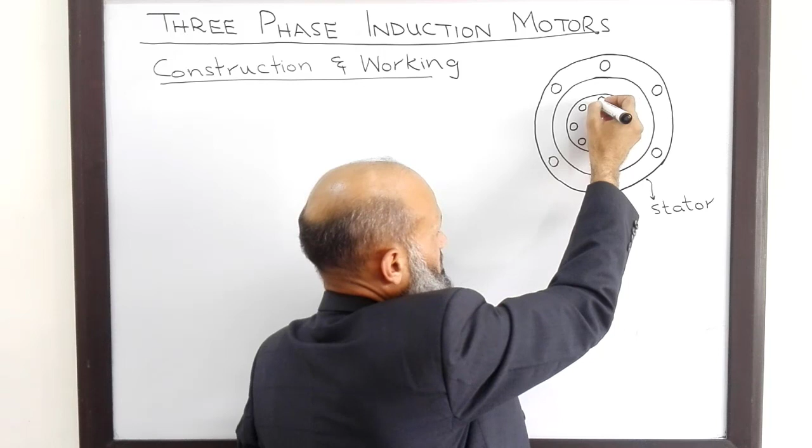These bars are then shorted to each other with the help of shorting rings, both at the front end as well as at the back end. So if you look at the rotor from the side view, it should look like this one. We have a cylindrical rotor with multiple bars of conductors placed on it, and at both the ends these are shorted by shorting rings. Here is a shorting ring and here is another shorting ring.

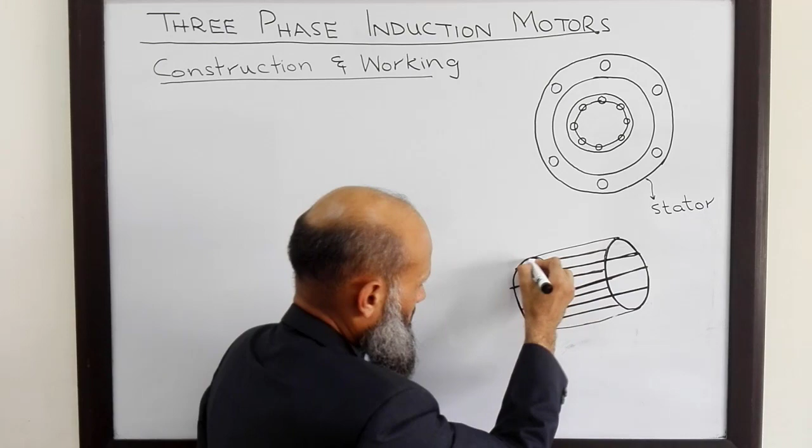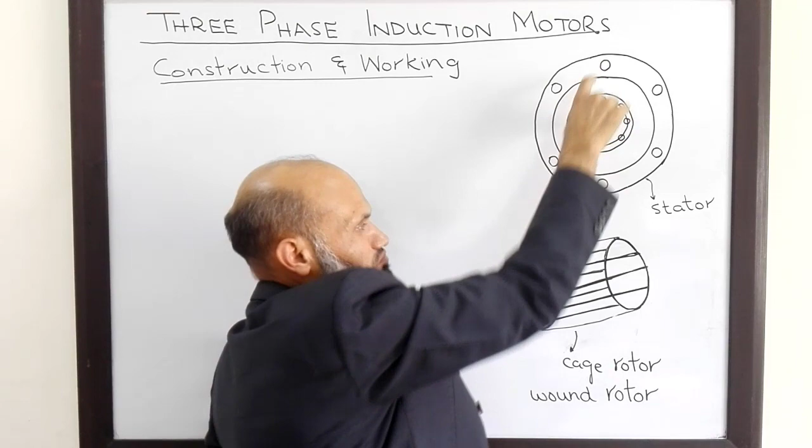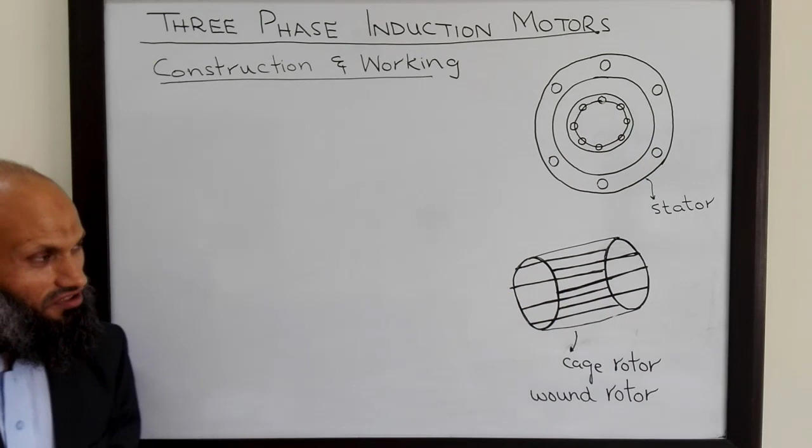This is not the only type of rotor in three-phase induction motors. This is the simplest one, which is called cage rotor, and this has the advantage of low cost. There is another type of rotor which is called wound rotor. In case of wound rotor, the windings on the rotor are just the mirror image of windings on the stator. Corresponding to this coil there will be one coil over here, and likewise corresponding to the third coil there will be a third coil on the rotor.

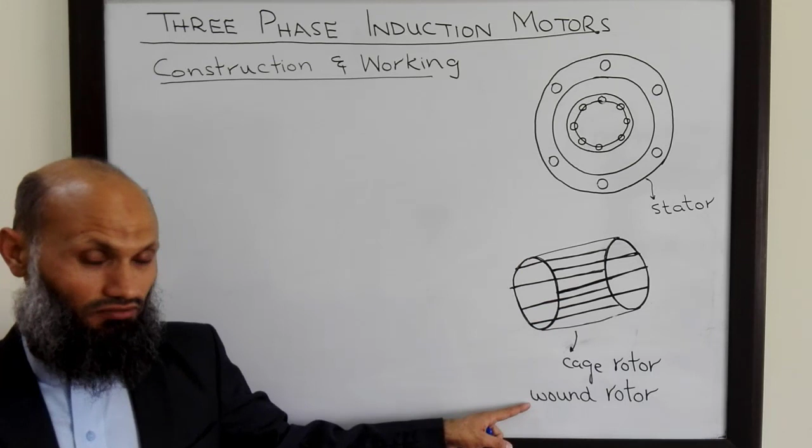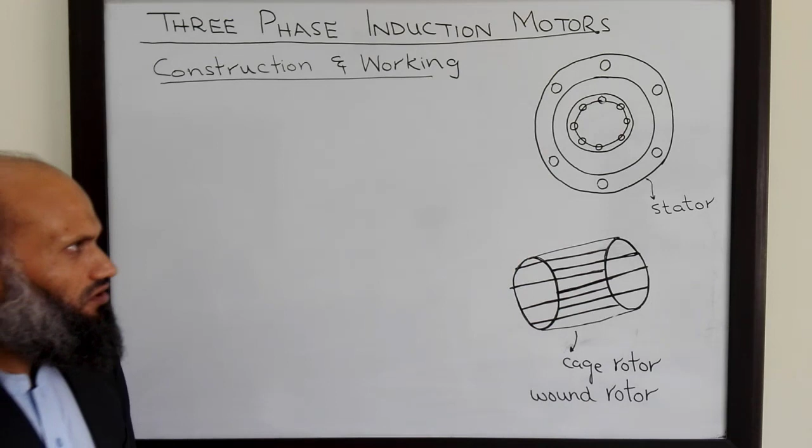The wound rotor is more expensive and is less commonly used. However, this wound rotor has an additional advantage. That is, we can modify the torque speed characteristics of this three-phase induction motor with the help of wound rotor. We shall talk about that in the later lectures.

Next, we talk about working of this three-phase induction motor. When three-phase currents are supplied to the set of three-phase coils placed on the stator, a rotating magnetic field is produced, denoted by Bs. The speed of rotation of this stator magnetic field is related with the frequency of the voltage supplied to the stator windings. For a simple two-pole machine, depicted over here, the speed of rotation of the stator magnetic field is equal to the frequency of the applied voltage.

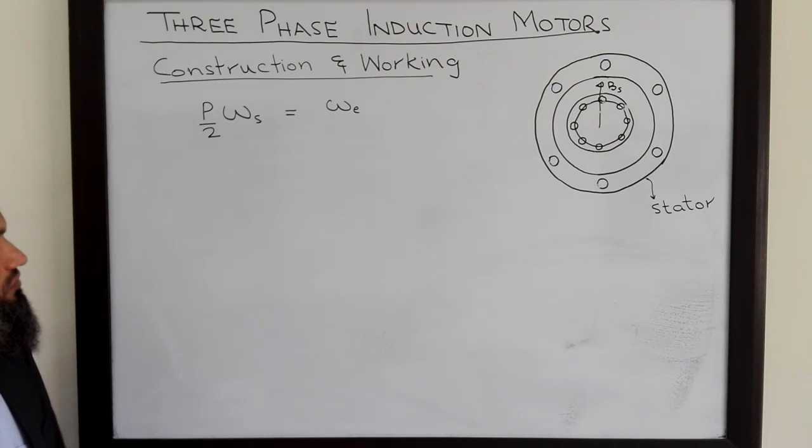And if you have more poles on the machine, then we have this relation. This frequency is related with the speed of rotation in this way. If you represent the speed in revolutions per second, then this speed is given by this, where Fe is the frequency of the voltage signal in hertz, which can also be written as 2 Fe over P. Here this speed is in revolutions per second.

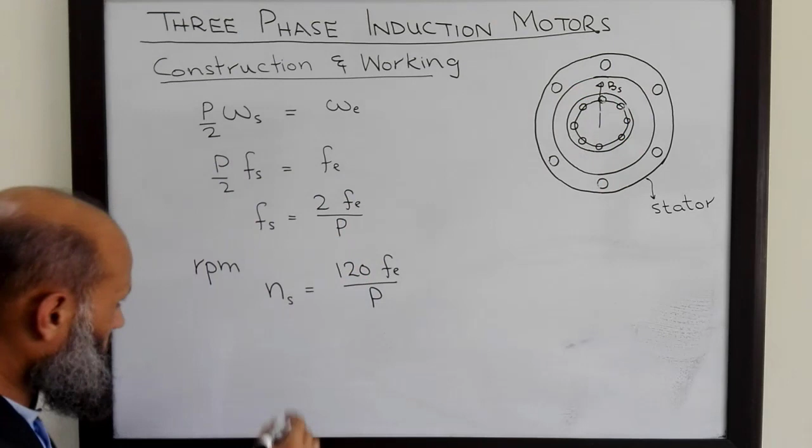This is a mechanical quantity, and it is more convenient to represent the speed in revolutions per minute. If Fs is revolutions per second, then 60 multiplied by this will be revolutions per minute. So the speed of this rotating magnetic field is 2 multiplied by 60, which is 120 Fe over P. This speed of rotation of the stator magnetic field is called synchronous speed. This is the speed at which the rotor of a synchronous motor will rotate.

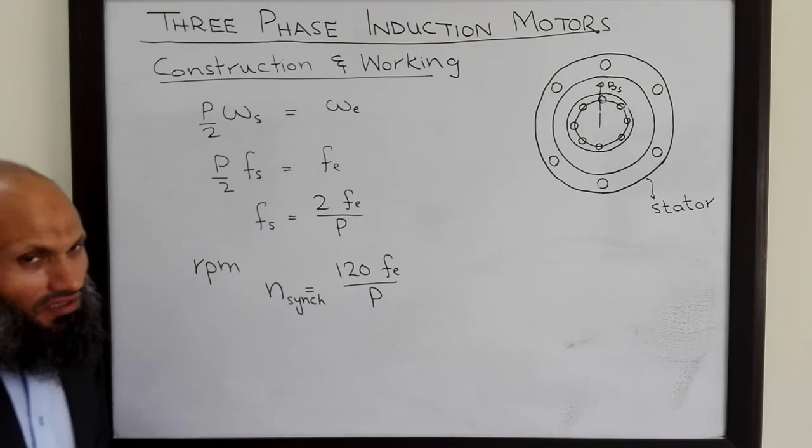So how is torque induced in this particular motor that will rotate the rotor? Let's elaborate with the help of figures. On the rotor we have these rotor windings, and due to stator windings we have the stator magnetic field. This stator magnetic field is rotating with synchronous speed.

This rotating magnetic field links with these conductors, and we know that when a conductor is placed in a magnetic field and there is relative motion between conductor and magnetic field, voltage is induced. That induced voltage is given by the relation (v cross B) dot l, where v is the velocity of the conductors relative to this magnetic field. So due to relative motion between the conductors and the stator magnetic field, voltage is induced in these conductors. And since these conductors are shorted through shorting rings, current will start flowing in these conductors.

For this particular time instant, this is the plane of maximum voltage. That is, maximum voltage will be induced in this plane, because here the stator magnetic field is maximum. And current will flow in these conductors. Direction of current in these conductors can be easily determined. We know that this is

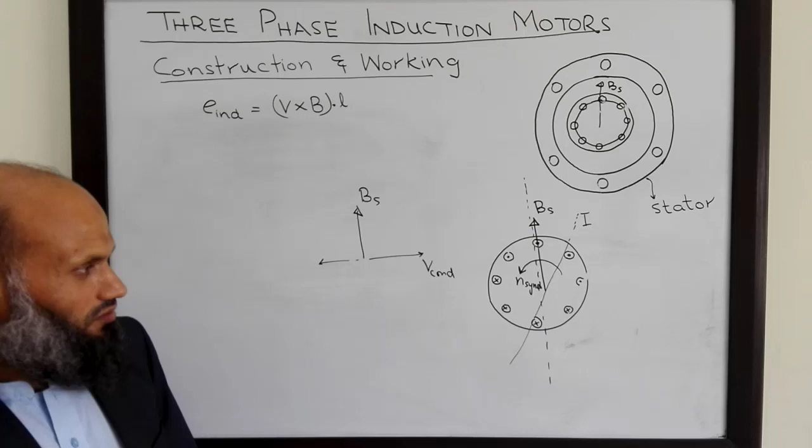Due to this current in the conductors, there will be a magnetic field. Direction of magnetic field can also be determined. Current is entering in these conductors and leaving in these conductors. So here is the direction of rotor magnetic field. And now, due to interaction of these two magnetic fields, a torque will be induced, and that induced torque is given by this relation. This torque will cause the rotor to rotate.

The direction of induced torque will be such that it will tend to align both the magnetic fields, Br and Bs. Bs is rotating with synchronous speed, so this rotor will also rotate. This is the same phenomenon which occurs in the damper windings of a synchronous motor that we have already talked about. Remember that for this three-phase induction motor, rotor will not rotate with synchronous speed. It can reach near synchronous speed. However, it will not run at synchronous speed.

Why? Because if the rotor is rotating at synchronous speed, and what is the speed of rotation of stator magnetic field? That is also equal to synchronous speed, n sync. If this rotor is also rotating with the same speed, there will be no relative motion between the stator magnetic field and these conductors, and hence no voltage will be induced, no current will flow, and hence there will be no rotor magnetic field and no torque.

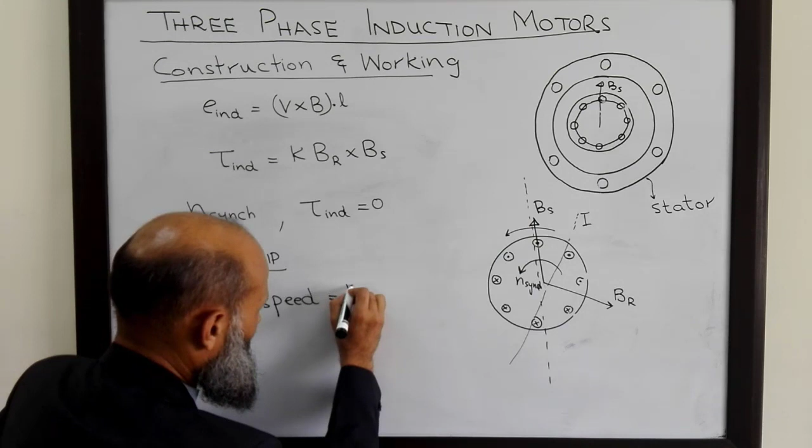So if rotor rotates at synchronous speed, induced torque will become equal to 0, and hence the rotor will slow down. So for an induction motor, rotor does not rotate with synchronous speed. It can achieve near synchronous speed, however it does not rotate at synchronous speed. Therefore, we define a term for induction motors called rotor slip. There is a difference between speed of rotation of rotor and speed of rotation of stator magnetic field. So we define slip speed: the difference between the two speeds, that is synchronous speed minus speed of rotation of the rotor of this induction motor.

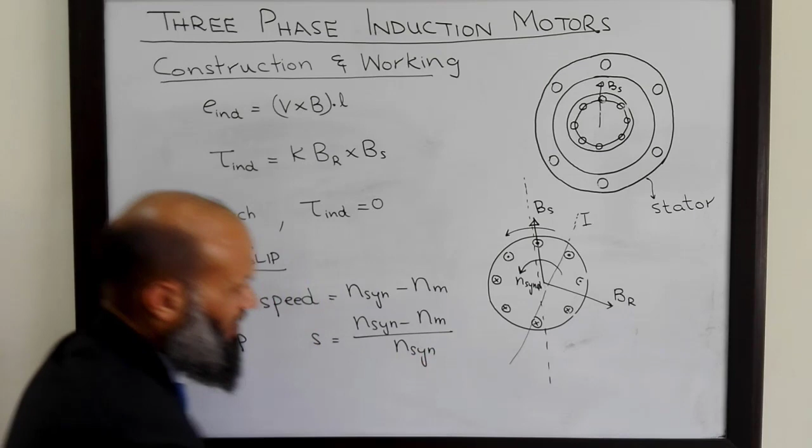And we also define another thing which is called slip. Slip is defined as synchronous speed minus speed of the motor divided by synchronous speed. And if we are interested in percent slip, then we just multiply it by 100. What we can see is that for synchronous motors, speed of rotation of rotor is always equal to the speed of rotation of the stator magnetic field, n sync. Therefore, for synchronous motors, slip is equal to 0.

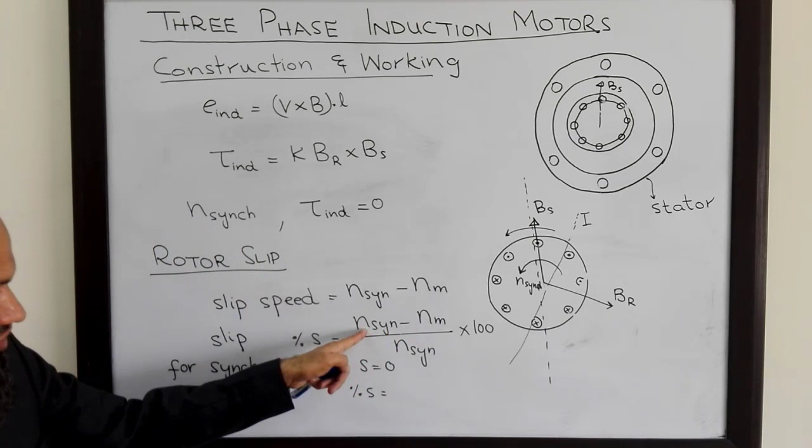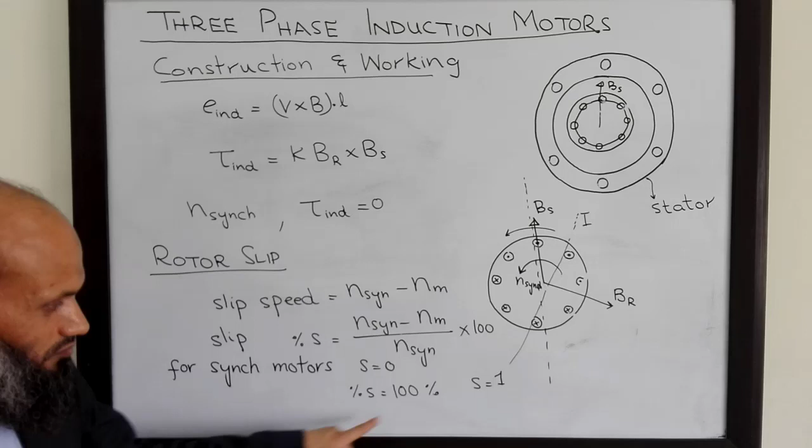And for the case when this rotor is stationary, how much will be slip? Percent slip will be equal to 100%. This is 0, so n sync divided by n sync multiplied by 100 is equal to 100%. The slip corresponding to the situation when rotor is locked is 100%, or slip is equal to 1. For an induction motor, slip is always between 0 and 1.

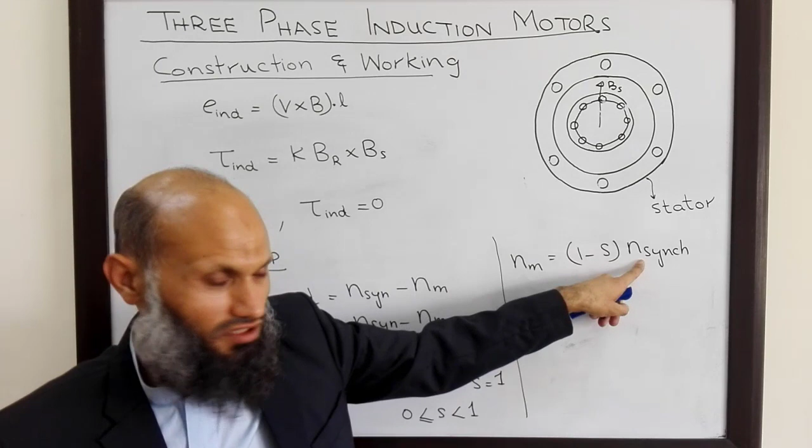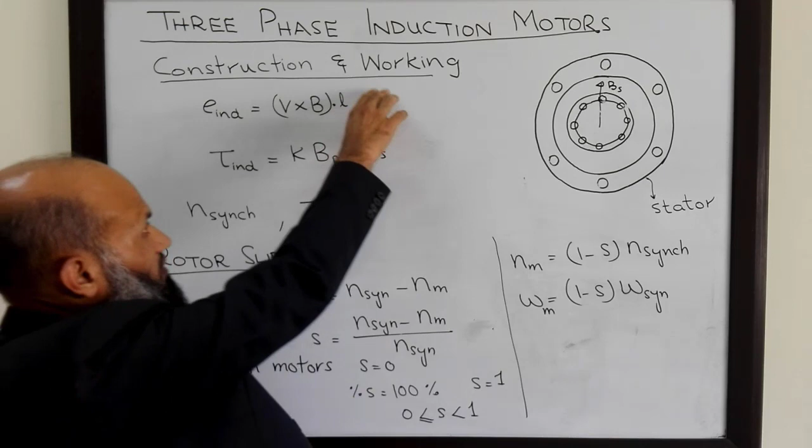We can also rearrange this equation to write it in this form. Speed of rotation of motor is related to synchronous speed with slip, or in terms of radians per second, speed of rotation of motor is given by this relation. This is a brief introduction to the working of three-phase induction motors. In next lecture, we shall talk about torque speed characteristics of three-phase induction motors.